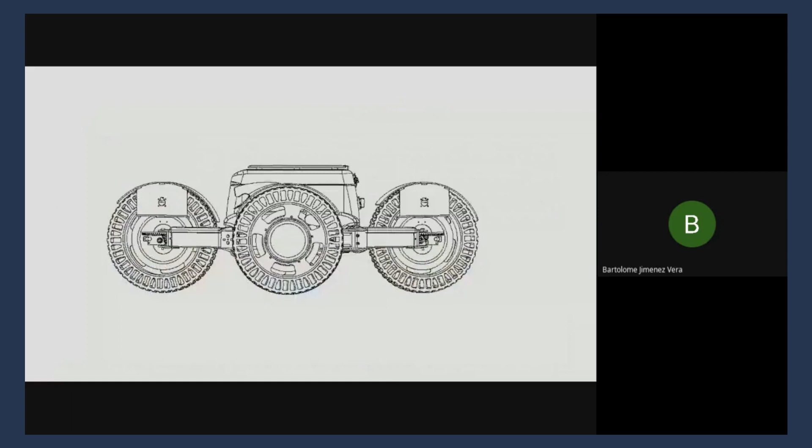To drive more towards what actually drives interest here, we make all the parts. We have 4 motor controllers, we have 4 wheels, each has a motor. We develop software for the motors, and they run on an STM chip.

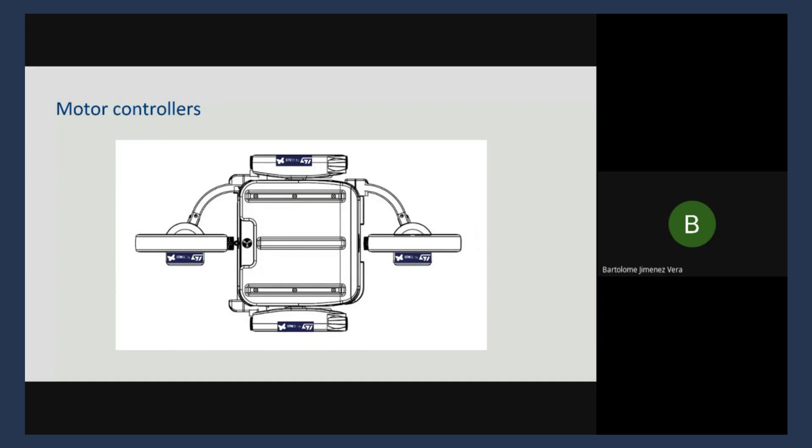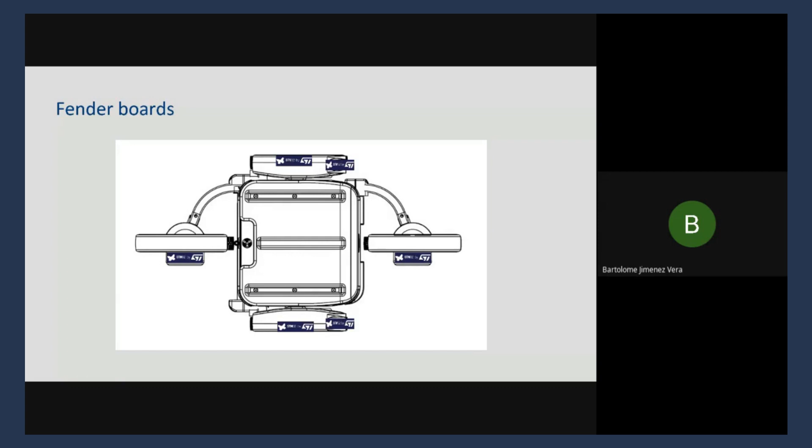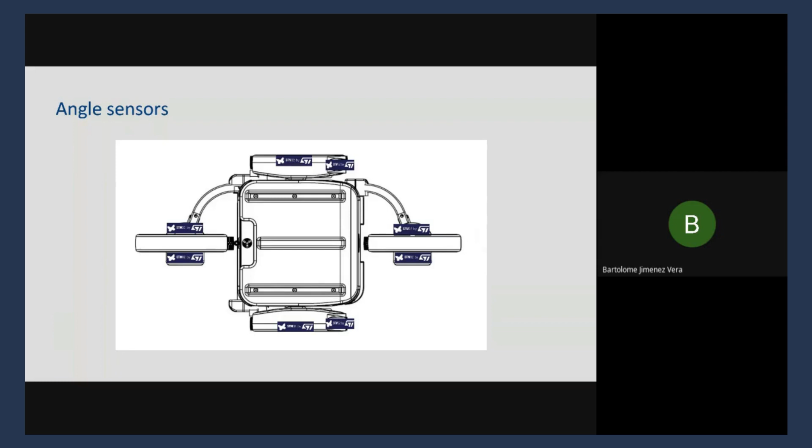On top of that, we have fender boards. Those fender boards control brakes, some lights, headlights, and other types of sensors that we have there. Besides those, we have angle sensors that provide us the steering angles of the wheels, because in theory they should be aligned all the time, but it could happen that they're not, and we need to get that information.

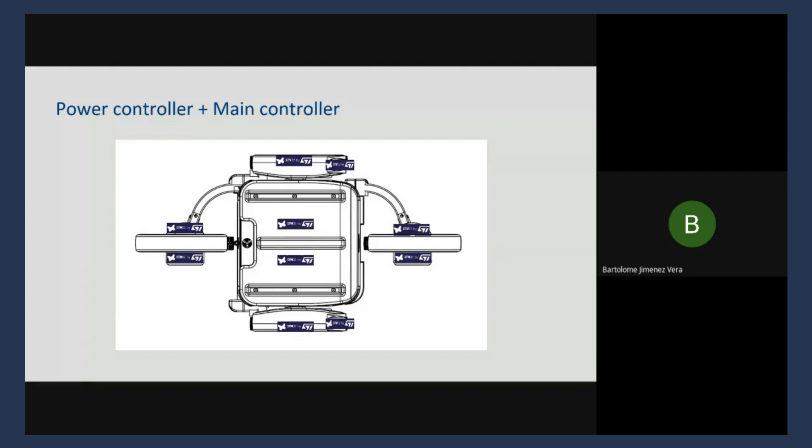Besides this, we also have a main control board and a power control board, so we get to split the logic between the main control - what the key power on does - and what actually controls the operational logic on the embedded side. This also allows us, from experience, to have the opportunity to have the whole control loop on the embedded system.

So yeah, we have basically 10 STM32 chips around the body. The STM32 chips go through different variants - F4, F7, L4. There are different types there.

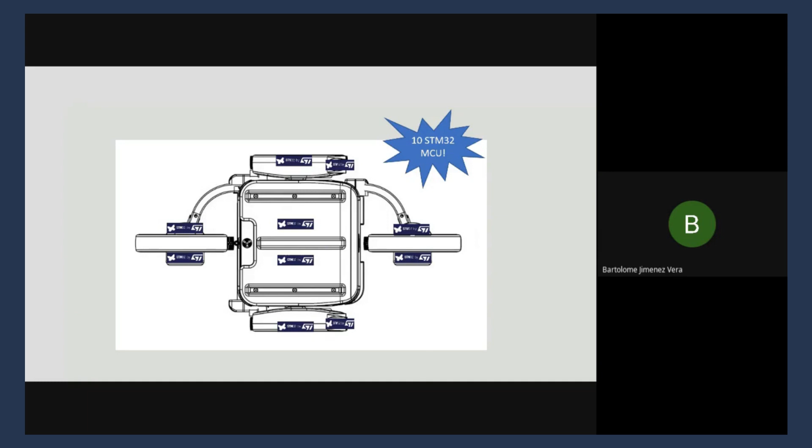That board has an Ethernet output, and that's where we have our micro-ROS client running. That then communicates with the Jetson Nano, which is the main robot system component - that's basically what we focus on in this part.

On the embedded side, we have the full control loop embedded, so we have full control of that as well. Our buses run at the speed we desire - we can do deterministic, full deterministic control on the odometry basically. We are using C++17 on our embedded side with some limitations, of course. We have no exceptions, we do no dynamic allocations, and some other things we had to custom constrain ourselves to use. We have implemented our own lifecycle manager.

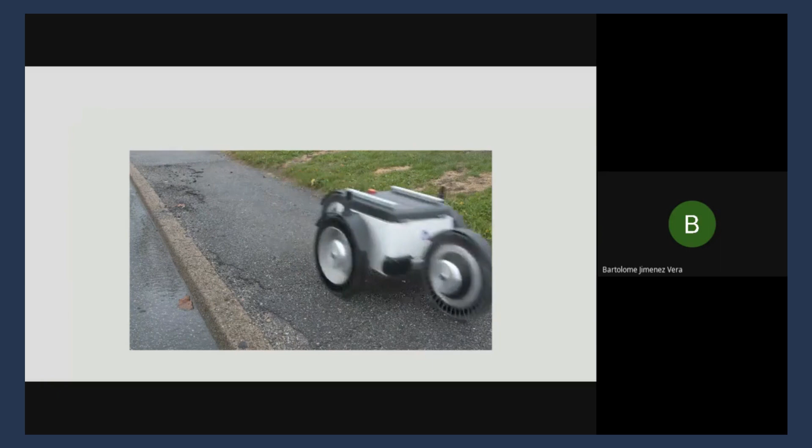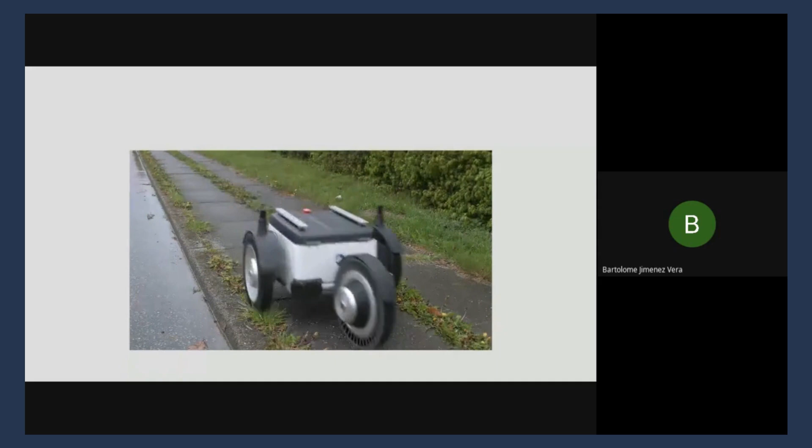Just to show a bit of the robot, let's see if this works. This actually is our prototype 4. Our idea is that we'll be releasing our prototype 5 after summer vacations, and then we'll be going out on the market.

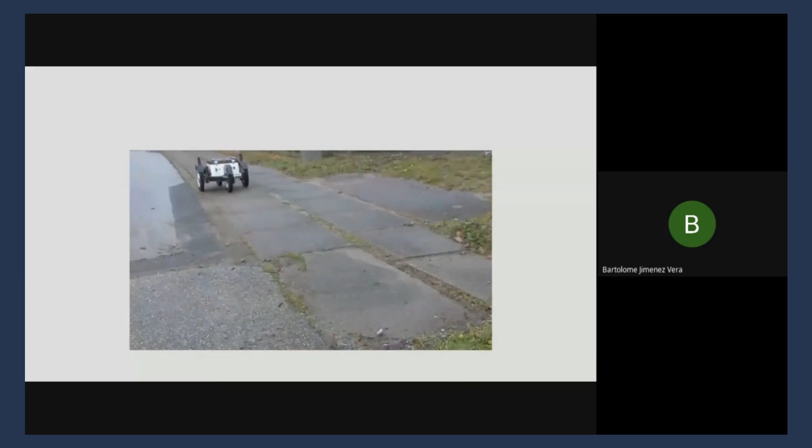Yes, thank you, that's pretty much it. Yeah, I honestly kept it simple.

My intention was also to just say that we've been interacting with the people through GitHub more than anything, with the people from micro-ROS. It's been quite an amazing experience through there. It's really interesting to know how micro-ROS is being useful and is being adopted in nearly commercialized products.